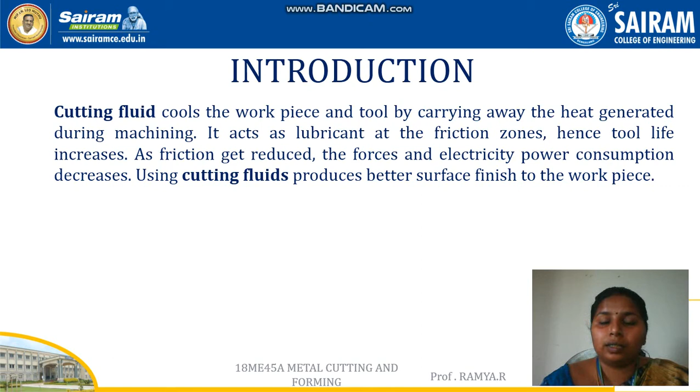Using cutting fluid produces a better surface finish on the workpieces. So there are many uses in using this cutting fluid. It removes the heat, it gives a better surface finish for the workpiece, and it also reduces the force and the electricity consumption. So there are a lot of advantages in using these cutting fluids.

Now let us see various functions of a cutting fluid. So cutting fluid cools the workpiece and tool by carrying away the heat generated. So this is a very important function of a cutting fluid. It removes the heat, giving a better surface finish. So it acts as a lubricant at the friction zones.

So in tool wear we saw, because of the friction between the tool and the workpiece, many wears occur, like crater wear, flank wear, which results in damaging the tool, and it also decreases the life of the tool. So the cost is increased and it becomes a burden for everyone.

So this cutting fluid acts as a lubricant between the friction zones. So in the zones where the friction occurs, if you are protecting those zones, then there will be no wear, which can increase the tool life and the cost of the product can be reduced. As the friction gets reduced, the forces and the electricity consumption are reduced. Using cutting fluid produces a better surface finish on the workpiece.

It causes the chip to break into small pieces. It washes away the chip from the tool. It prevents the corrosion of chips and machine. It improves the dimensional accuracy and control on the workpiece. It permits a maximum cutting speed, hence time for machining is reduced and the cost of manufacturing decreases. So these are various functions of a cutting fluid.

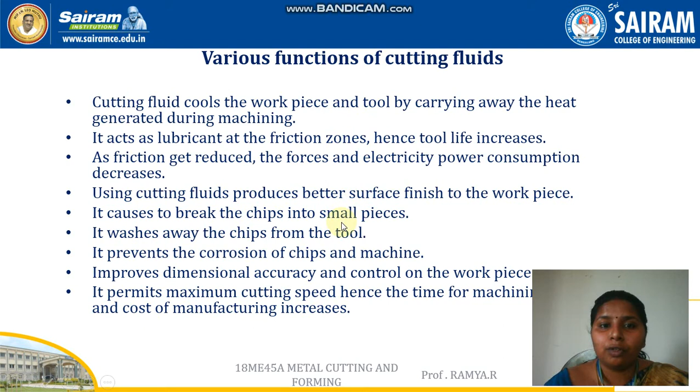So the next one is, what are the properties that should be possessed by a cutting fluid, so that we can tell this is the best cutting fluid? It should have a low viscosity to permit free flow of the liquid. If the cutting fluid is highly viscous, it will not flow freely on the surface. So it should be of a low viscosity so that there will be a free flow of the liquid, and it should possess good lubricating properties to avoid the friction.

It should have a high specific heat, high heat conductivity and high heat transfer coefficient, because the ultimate aim of the cutting fluid is to reduce the heat generated. And the next one is, it should be non-corrosive to work and machine. If it is corrosive, it reacts chemically on the surface of the workpiece and the tool and makes it a poor component, or it should be sent to scrap only.

It should be non-toxic for the operating person, and it should be odorless. If there is a strong odor, it will not be suitable for machining.

So the person who was doing the machining may feel uncomfortable and it may lead to many allergic diseases. So it should be stable in use and storage. It should be safe. It should not be like an acid kind, and it should permit clear view of the work of the operation.

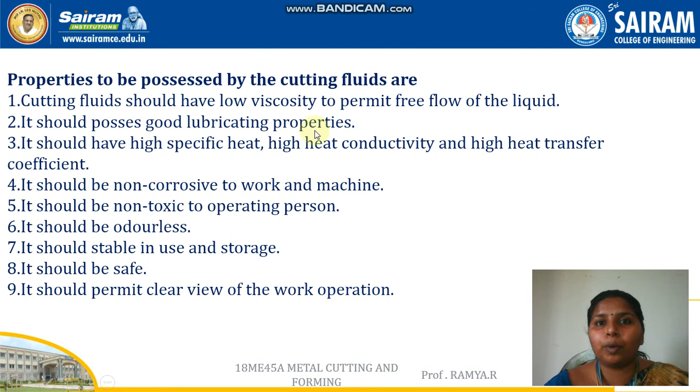So it should be transparent so that the operator can see what machining is taking place. So if it is a very dark one, we cannot see what's going on between the tool and the workpiece. So these are some of the properties that a cutting fluid should possess. The next one is

type of cutting fluids. So cutting fluid is majorly classified into two types. One is oil based fluids and the other one is chemical based fluids. So oil based fluids are of two types. One is straight oils, the other one is soluble oils. And the next one is chemical based fluids. So it is also of two types. One is semi synthetic fluids, the other one is synthetic fluids.

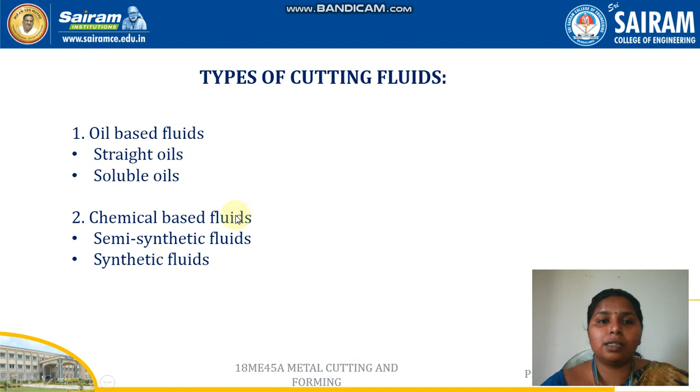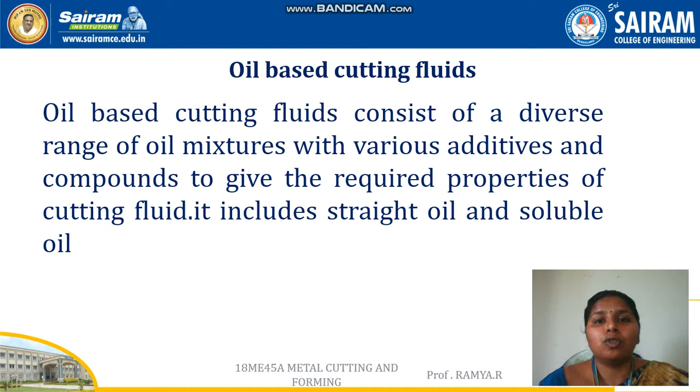So now let's have a brief discussion about what is oil based cutting fluids. So oil based cutting fluids consist of a diverse range of oil mixtures with various additives and compounds to give the required property of a cutting fluid. So it is not that all fluids can directly be used as a lubricant or a cutting fluid. So some additives, some extra components are added with the oil, so that it can act as a good cutting fluid and a lubricating oil. So there are two types. One is straight oil, the other one is soluble oil.

Now first let's look into what is straight oils. They are also called neat oils as they don't contain water. It contains 100% petroleum oil or mineral oil along with some lubricants such as fats, esters, vegetable oil, as well as extreme pressure additives. So the extreme pressure additive is one major component which is added with all the cutting fluids to make it work better. So additives are needed for a heavy machining operation.

Extreme pressure additives such as sulfur, chlorine or phosphorus compounds are often used as an additive to make the cutting fluid a better performing one. These additives improve the lubricating and wettability property. So these extreme pressure additives are used in almost all types of cutting fluids.

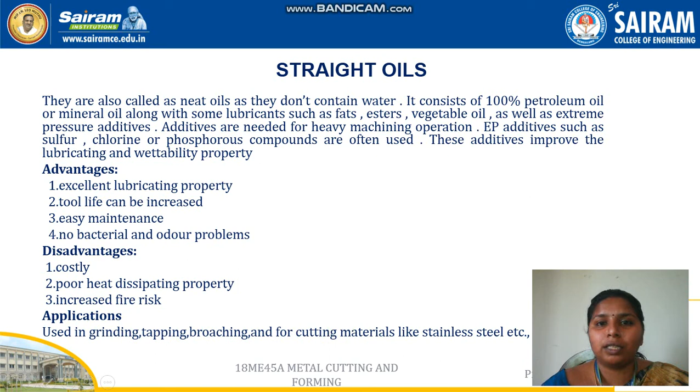So if we look into the advantages of straight oils, they have an excellent lubricating property, tool life can be increased, easy maintenance, no bacterial and odor problems. And the disadvantages are the cost is very high and poor heat dissipating property. So it doesn't absorb all the heat, it has a very poor heat dissipating property, and increased fire risk. And applications are grinding, tapping, broaching, and cutting materials like stainless steel, etc. So this is about straight oils.

The next one is soluble oil, an emulsifiable oil such as mineral oil containing sulfonated oil or soap as an emulsifier, for use in the form of an aqueous emulsion as a cutting fluid, textile lubricant, and as a carrier for insecticide. So this soluble oil is majorly used as a cutting fluid or a textile lubricant and also used for insecticides.

So the advantages are, it has good lubricating properties, is suitable for medium and light duty work, and it is least expensive. And the disadvantages are maintenance cost. The purchase cost is less but the maintenance cost is high. It is not suitable for stainless steel and the presence of water initiates bacterial growth. So for applications, it is suitable for low and medium tensile steels. It is not suitable for stainless steel but it is suitable for tensile steels.

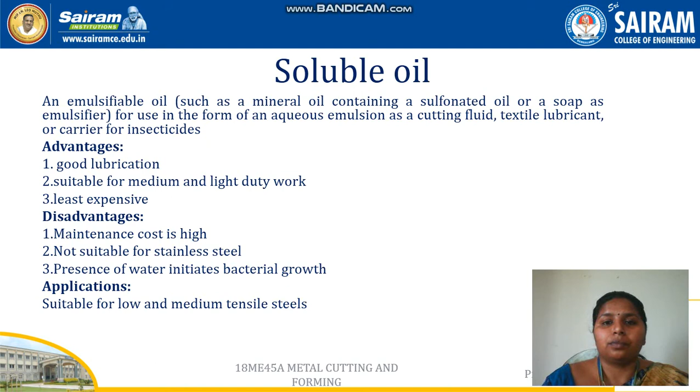So the next one is chemical cutting fluids. So chemical cutting fluid contains little or no oil, with emulsion and extreme pressure additives. So we saw in the oil type, extreme pressure additives are nothing but phosphorus, sulfur, etc. So they are widely used in industries.

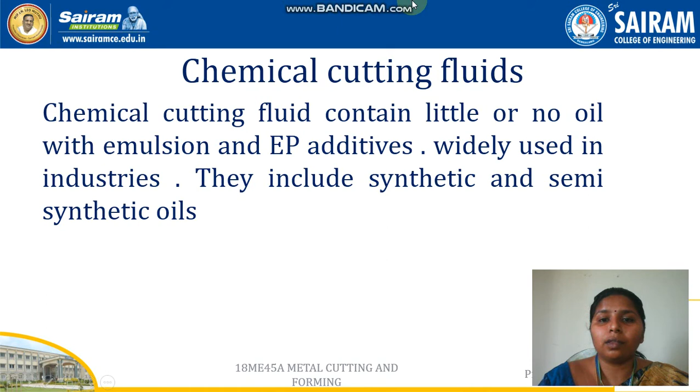They include synthetic and semi-synthetic oils. And the next one is about synthetic oils. They are water-based fluids and contain no mineral oil. So usually chemical cutting fluids don't contain any oil. They have a typical particle size of 0.003 mm.

Water provides excellent cooling properties but creates the problem of corrosion. Also, it is not an effective lubricant. So to prevent such rust formation, rust inhibitors are added. The advantages of synthetic oils are good corrosion control, superior cooling properties, easy maintenance, and they can be stored for long periods of time.

Disadvantages of synthetic oils are that they have a tendency to foam, and if foam is created, we cannot see the machining happening, and it will be difficult for the operator to do the machining operation. So this is a major disadvantage. The lubricating property is not satisfactory. A very good lubricant prevents friction between the workpiece and the tool. So if it does not possess a good lubricating property, it is not very suitable for machining operations, and it can be easily contaminated and spoiled.

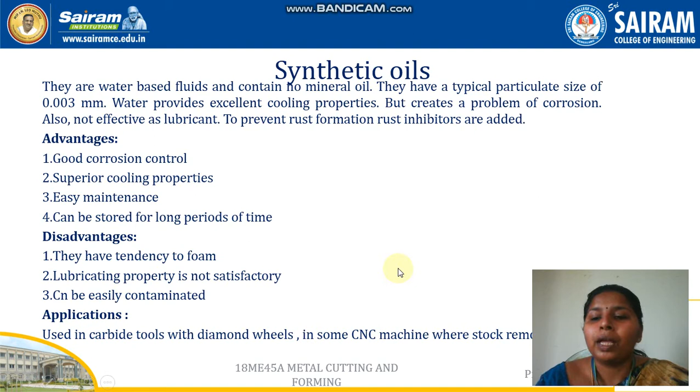The applications are carbide tools with diamond wheels, and some CNC machines where stock removal is low. It is not used for high stock removal processes, only for very low stock removal. The next one is semi-synthetic oil. They are a mixture of soluble oils and synthetic fluid, that is, emulsions and water-based fluids. About 5 to 20% of mineral oil is emulsified with water to produce a micro emulsion. The particle size varies from 0.01 to 0.1 mm. This is small enough to transmit all incident light.

This type of fluid is largely used due to the advantages of both soluble oil and synthetics. The advantages of semi-synthetic oil are rapid heat dissipation, cleanliness of the system, and bioresistance due to small particle size. Disadvantages are that it is easily foamable, so it is not suitable for machining, and the lubricating property is only satisfactory, not very good. Also, water hardness affects the stability of semi-synthetic oil. Applications are general machining operations and grinding where high surface finish is required.

So when we compare the oil type and the chemical type, oil type cutting fluids appear to be better than chemical cutting fluids, as chemical cutting fluids can easily create foam, which is not good for a machining operation.

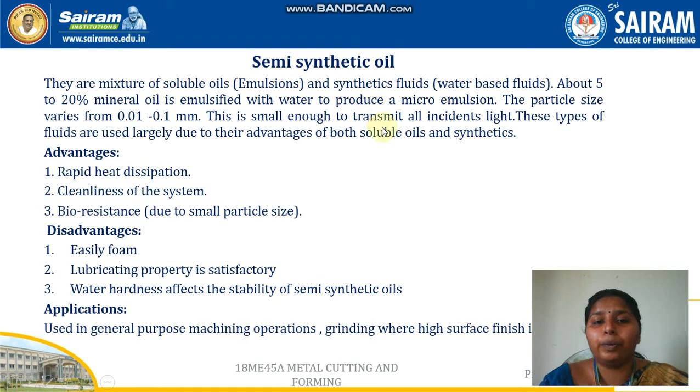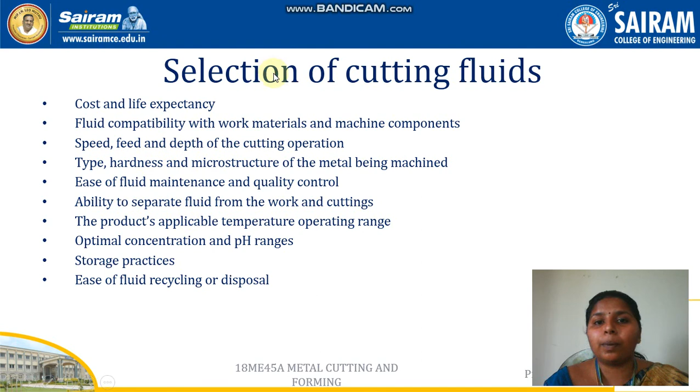The next one is selection of cutting fluids: cost and life expectancy, fluid compatibility with work materials and machine components, speed, feed and depth of cut, type, hardness and microstructure of the metal being machined, ease of fluid maintenance and quality control, ability to separate fluid from the work and cuttings, the product's applicable operating temperature range, optimal concentration and pH ranges, storage practices, and ease of fluid recycling or disposal. These are the factors to be considered while selecting a cutting fluid for a particular machining operation.

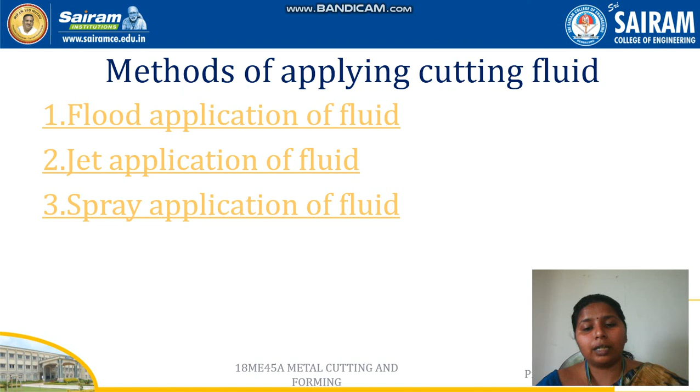The next one is methods of applying cutting fluid: flood application, jet application, and spray application of fluid. The first one, flood application, delivers fluid to the cutting zone by means of a pipe, hose or nozzle system. The second one, jet application, directs fluid directly to the cutting zone. The third one, spray, is atomized by a jet of air, and a mist is directed to the cutting zone. These are the three methods of applying cutting fluid. So this is about cutting fluids in a machining operation.